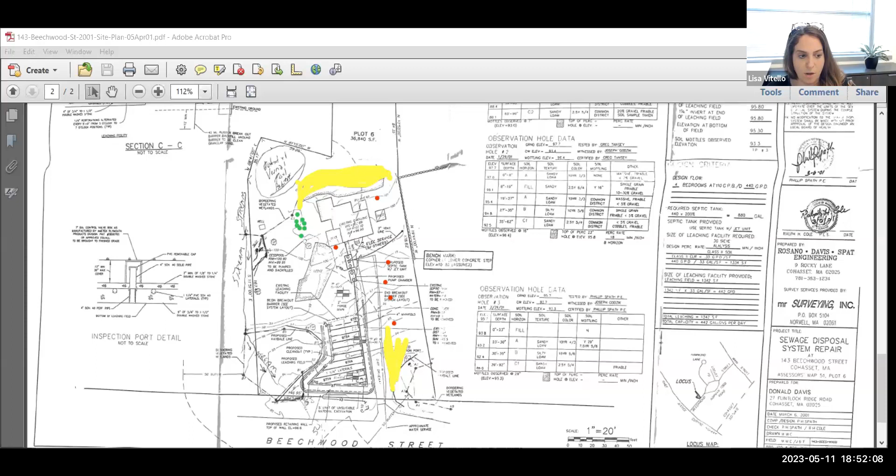Sure. Just for background, we purchased this home in January, so we are under some renovation. We're not expanding the footprint whatsoever. We're just making it up to date.

So with that, we did have an arborist come through and give us an opinion. There's a lot of trees that looked unhealthy, some were problematic from a power line perspective, close to the power line, and one had been struck by lightning. So we noticed some of the trees in the property were in bad shape and wanted another opinion. That's how we came up with this plan. We took a look at anything that was affecting or could affect people, the home, or power lines, and that's where we came up with the red dots.

I know this was from a scanned site plan, so if you guys can follow my cursor here, this is the 50-foot buffer to the bordering vegetated wetland on either side of the property. There's a BVW in the front of the property on the left and right side with an intermittent stream, and this line here is the 50-foot buffer. So there are two trees within the 50-foot buffer they're proposing to remove.

I can show you guys photos. And then 4 here, I believe, on the eastern side of the driveway in the 100-foot buffer. So she has submitted a variance request, or they have submitted a variance request as well for the work in the 50.

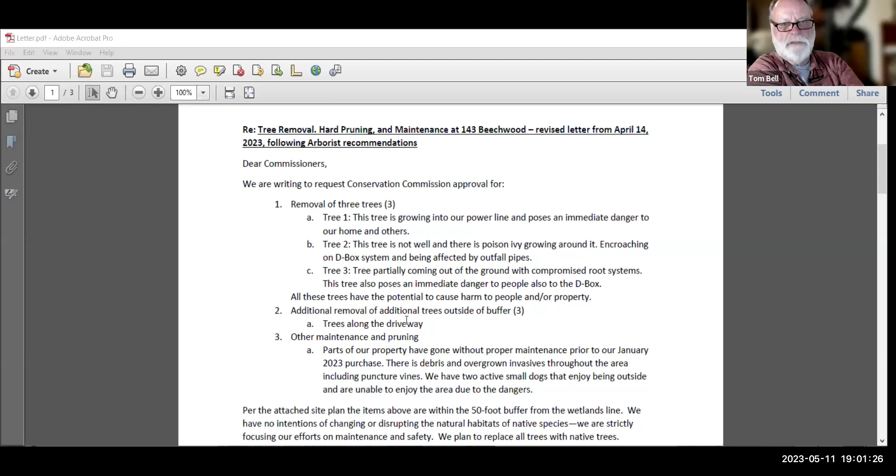Keep looking, Charlotte. Don't mean to distract you. No, that's okay, I wanted to make sure I didn't miss it. This was the letter that I received, but I don't think this is from Total Tree. No, that was our update.

So I did speak to a certified arborist, Gary at Total Tree. He did evaluate the trees - it was more just an on-site discussion briefly, but he did say that at least the trees on the eastern side along the power lines, in his opinion, should be cut down. The one tree he was hesitant on was the black cherry. He wasn't sure about the root system potentially compromising the septic tank. But at least with these trees, looking at them on site, he did say they should be removed.

I'm sorry, I didn't get anything documented. But at least the ones near the power lines, I asked him, can you prune instead of just cut? He said sometimes with those large side leaders, that could hurt the tree even more. So in those specific cases he recommended taking them out rather than just pruning, but there are definitely a handful of trees on the property that probably don't need to be cut - they could just be pruned, especially the ones over the power lines. But this was the only tree where he didn't have a solid conclusion.

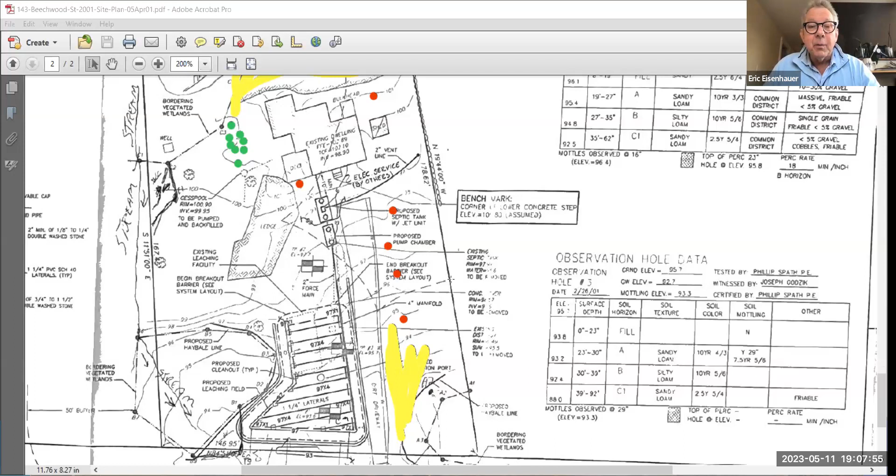Sorry, could you identify that leaning tree on this? I believe the leaning tree is this second one. Where? I'm sorry, I don't see where you're pointing, Charlotte. Can you guys see my cursor right here, the little arrow?

Second red from the bottom, Eric. Yeah, so this is the 50-foot buffer. I got it. But unless I'm mistaken, Lisa, it is the one in the 50-foot buffer, because I don't know if maybe the dots are a little bit out of place, but I thought the tree leaning into the driveway was almost directly behind that big one by lightning.

They could be slightly spaced out, but it could potentially be this tree. So it very well could be the one in the 50-foot buffer, but the dots, I admit, I'm not sure which one, if it's this one or this one. I'm pretty sure it's the second one, but unfortunately I can't say for sure.

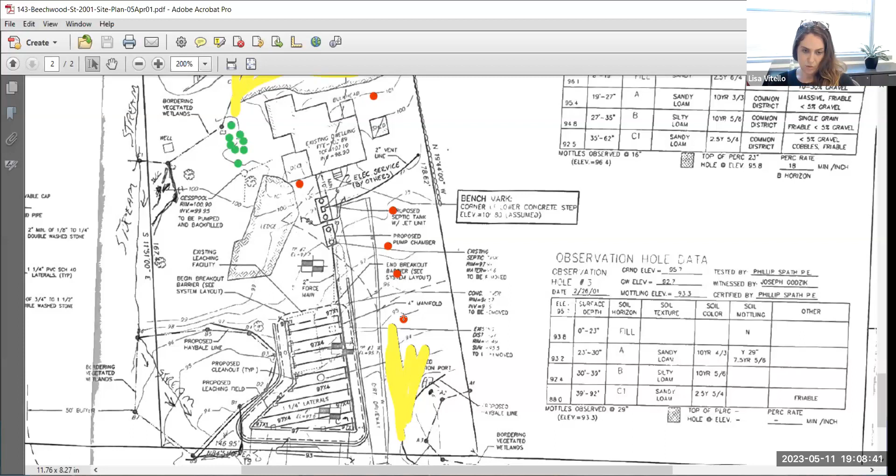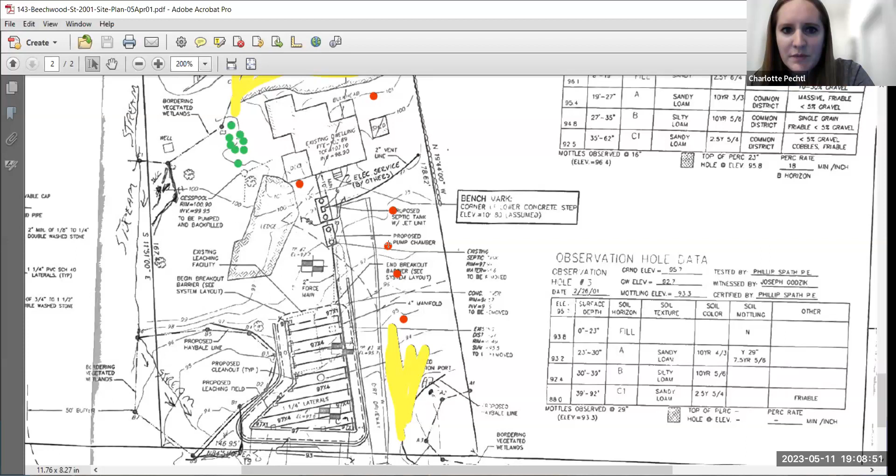Yeah, I think it's actually the third one from the bottom because it's directly also over the septic tank. Okay, so this one? Yeah, because the black cherry is actually right here, so it's almost right next to, like across from the black cherry. So it's in the 100-foot buffer.

I thought that dashed line that you showed... this is the 50-foot buffer. Oh, from the stream? I thought there was another, from both sides. Yep, so this is the wetland down on the southeast corner right here, and then this is the 50-foot buffer to that wetland, so it kind of crosses like that.

And then the stream and the wetland is right here, so the 50-foot buffer is right here. It's pretty much going through half the house and just outside of the septic tank.

Sorry, Charlotte, I don't follow anything of what you're showing there. Can I draw? Hold on, I'm gonna annotate. Hold on, I'm glad I can do this. So this is the 50-foot buffer to the stream on the left.

Yeah, the stream, let's see, is... it says stream. Hold on, that doesn't look quite right. This is the wetland here, and there's the other wetland here, and then the stream is going like, right here.

No, it looks like it crosses that. Oh sorry, it goes this way. There we go. Sorry, this is a very messy drawing. It's okay, it's all right.

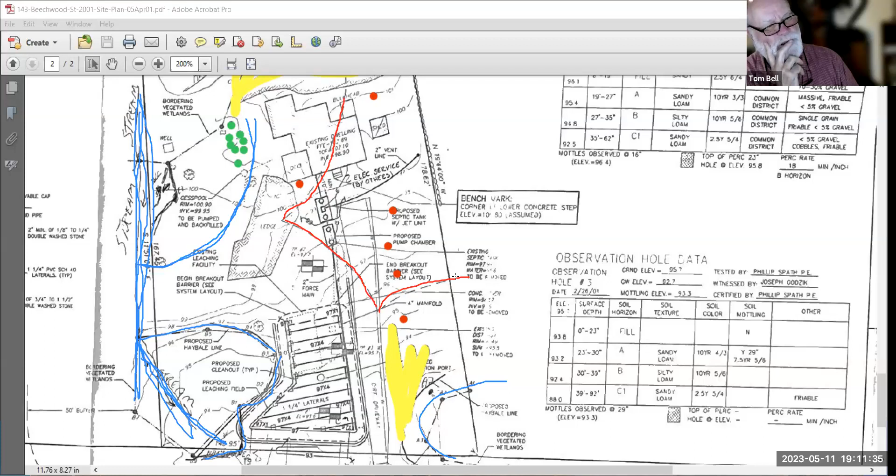What does that pointy corner of the 50-foot buffer right there by the ledge mean? That's because of the septic tank or something. The BVW border is further back from the blue line. If you see the note there, it's not actually the blue line.

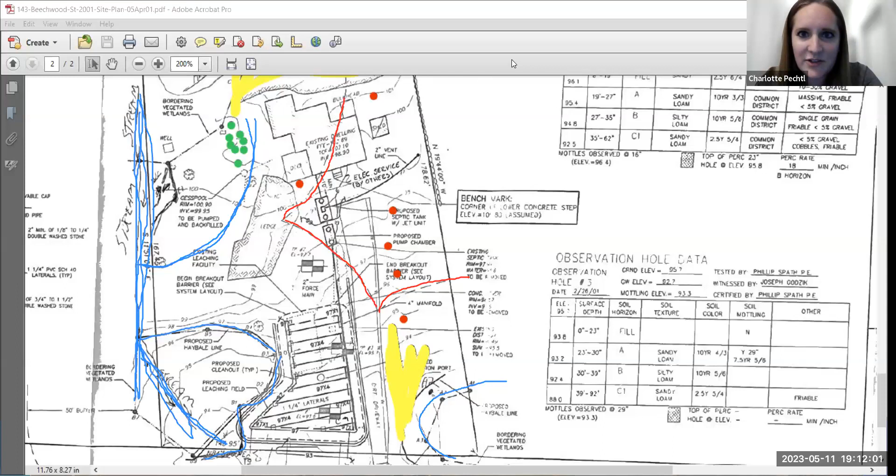Sorry, hold on, I've got to clear this. I think we need... don't clear everything. All we're determining is if we need an NOI or not, right? And it sounds like we do, because we don't know where any of these lines are.

This is from 2001, and that whole development was built behind here, and a lot of this stuff looks drier than it was then, because they put in a whole water detention system back there. So I don't even see a stream when I look at Google Maps now. There's nothing coming up on the stream there. It was a little dry because it's an intermittent stream, and intermittent streams are obviously dry a lot of the time, but at least with the wetland I can see the wetland here and here.

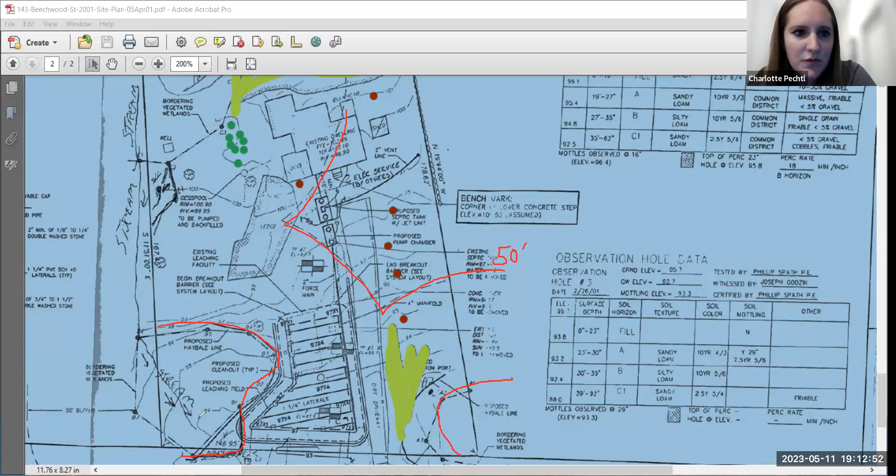Again, to the exact extent I'm not sure - how old are these wetland delineations, Charlotte? This was from... hold on, 2001. This was from 2000, hold on, sorry, I'm bad with annotations here. This was from a 2001 site plan.

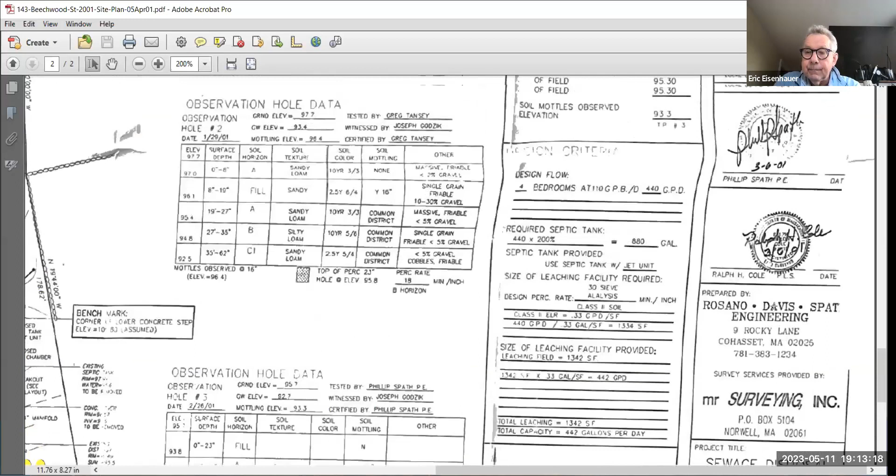This was for the septic system design. So the wetlands were probably delineated at some point between 2000 and 2001. It's out of date, so it's 10 years out of date. Isn't it 20 years out of date? Oh yeah, right, yeah, thanks.

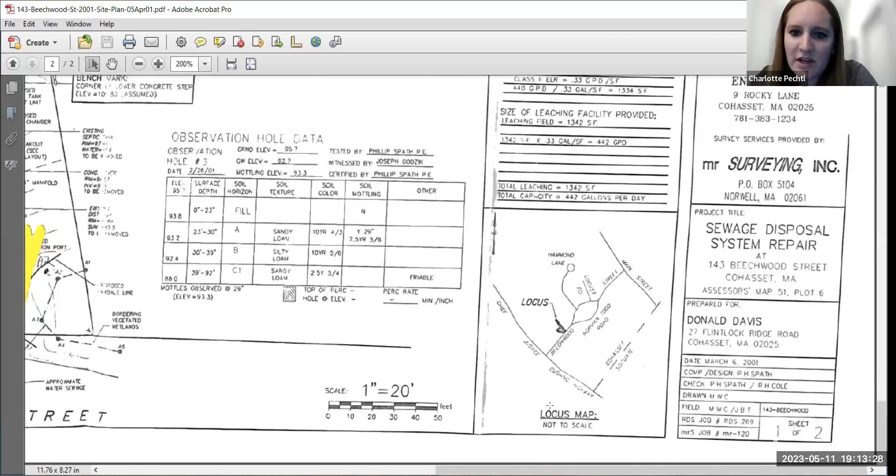Usually for RDAs, in most cases - well, this is coming back to us as an NOI almost certainly. So it should come back with a fresh wetland delineation. I would make that recommendation right now. I would second your motion, Tom. I haven't made a motion yet, but that's...

I heard you talk about an NOI here. I don't feel comfortable with enough of what I've been seeing here to take any decision whatsoever. I don't know where the trees are, I don't know where the buffer zone is, and somehow we have to have something clear and understandable that we all can discuss. I'm certainly not there yet.

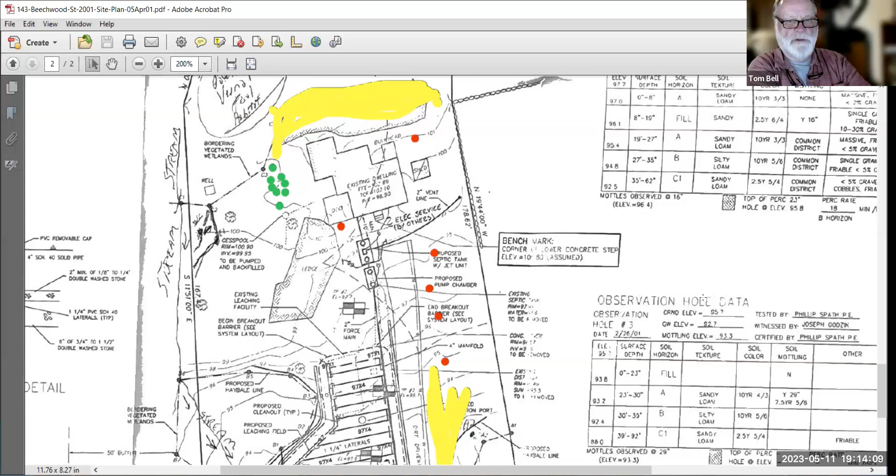So even for that tree that's clearly coming out of the ground over the power line, over the driveway, over the septic tank, I cannot take any action until there's another hearing. I'm just trying to understand what the next steps are.

I'm very concerned about this particular one from a safety perspective. You have the option of writing an RDA just for that one tree. So that one we're concerned about can be an RDA, and we can dispense with that pretty quickly and leave the rest for a larger NOI or whatever it may be, if everyone agrees.

Yeah, so something commissioners could vote on is just on this one tree, and issue a -3 determination by saying, in a condition, that the tree leaning over the driveway is acceptable to remove and does not require the filing of a notice of intent. All other proposed trees are not approved through the RDA and require the filing of a notice of intent. So you could potentially split up the work that way.

I think we've done that before, where we've approved one part of the project and said the other part, absolutely not. So Lisa, if you would want to prioritize removing just this one tree, if the commission would allow it, for all the other trees it sounds like we would recommend a notice of intent. If that's something everyone's open with, that would make me feel a lot more comfortable on this one.

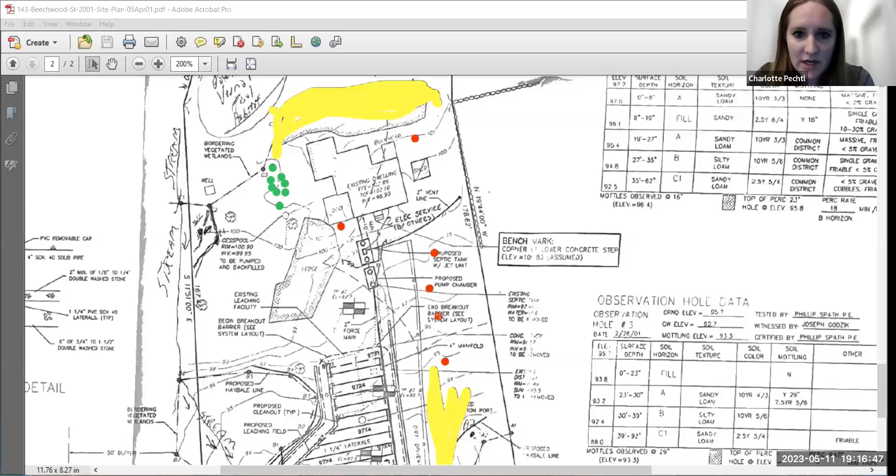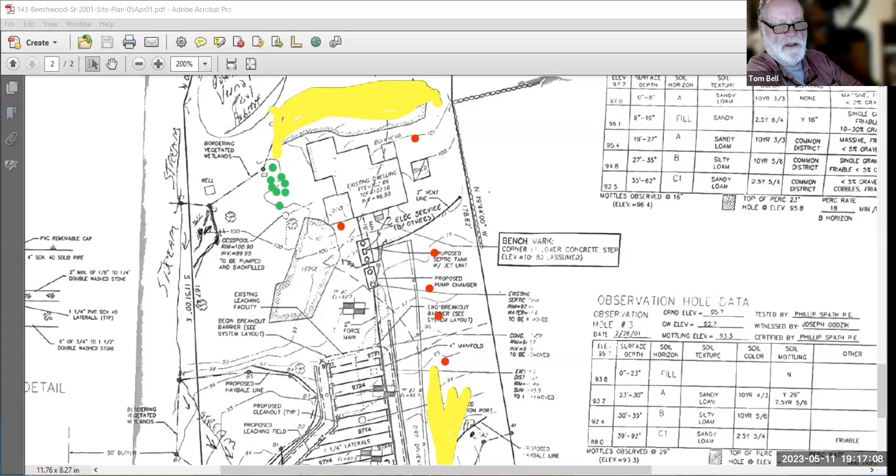So this is not the one that was in the 50, this would presumably be outside the 50 anyways. I admit I cannot be 100%, but I'm pretty sure it's this tree right here, which is just outside the 50. It looks like it's about 60 to 65 feet from the wetland. If it's the third tree from the bottom of the screen, could be this one too. It would still be in the 100. Correct. Okay, I'm all right with that then, so let's go with that.

So what is this, a +2, did you say Charlotte? It's a little tricky, so I think we would write a -3 determination with a condition that only the tree leaning over the driveway in the 100-foot buffer is approved to be removed. All other proposed work requires the filing of a notice of intent.

Okay, so moved. Oh sorry, I don't know if I can make a motion. What she said - we need to consider, is it or is it not in the 50? If it's in the 50, the wood has to stay there. If it's not in the 50, it seems they can cut it off. It seems to be the consensus, Eric, that it is outside of the 50. It's either the second or third tree, as we suspect, and if we're all happy with that, okay, that's fine.

Also, I'm sorry Lisa, I just noticed Jason in the audience. I apologize. That's fine, sorry. We're sorry if he was raising his hand and we did not see him. That's okay, we're both still in the office. We're in LA. Okay, apologize for that. Sorry about that, Jason.

Well, so I would say, Ms. Rockwood, if you're comfortable with this consensus that seems to be emerging - that the leaning tree can be removed right away, and that further cutting would require an NOI and a wetlands delineation - then we could go ahead with this. Yes, I'm comfortable. I don't know enough about an NOI, but I will learn and get back to you. But yes, as long as we can talk offline, I tend to always prove out Murphy's Law, so I just want to make sure that wall doesn't come down. I can bring you up to speed about the filing of notice of intent, so we can definitely chat after the meeting about this.

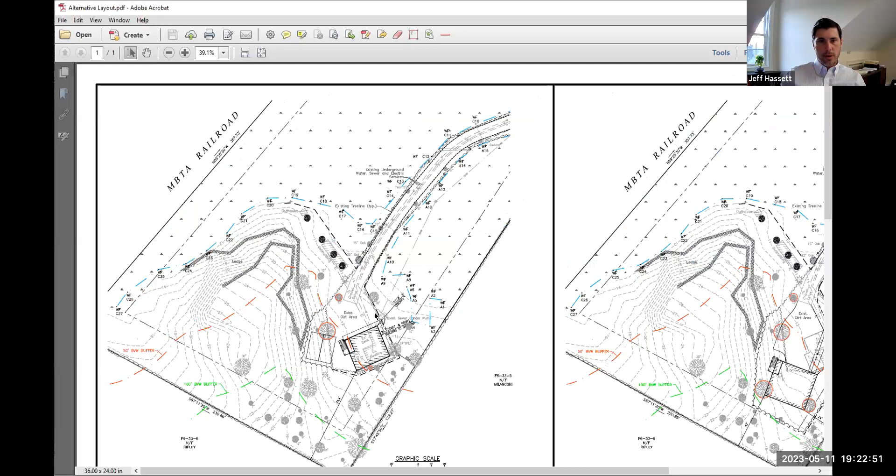What you're looking at is side by side the current proposal, which is to reconstruct the house in that same location, within the 50-foot buffer, but also within the footprint of the existing house and deck. It's going to be a slab on grade foundation, so no excavation for a basement, and no site grading. The utilities and driveway are already in place, and all the work is within that existing clearing, so it's a very small limit of work.

We're noting 3 trees to be removed, being that one, which is in poor shape, and then a smaller tree right next to the house. And that works out to be...

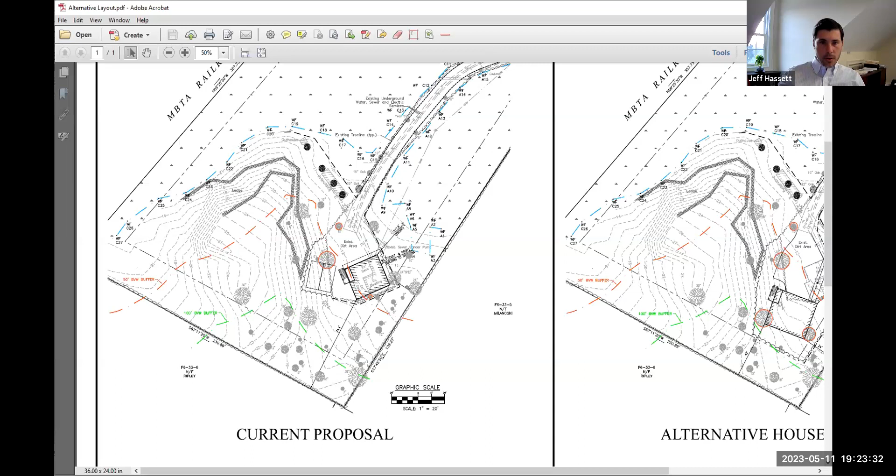Alternatively, this is what Greg, David, and myself were looking at this week, and what you talked about at the site walk earlier. We could potentially move the house entirely outside of the 50-foot buffer. It still complies with all the zoning setbacks. The driveway would need to be extended to the house, but it's again in that existing limit of work. The utilities would have to be extended too, but they fall within the footprint of the existing house, and that's a very minor job.

There are 2 additional trees to be removed, but they're outside of the 50-foot buffer anyways. What you'd end up with is 0 square feet of impervious in the 50-foot buffer, and we could also plant this area as a native planting area in the spot currently cleared and consisting of a portion of the house. So we are definitely open to that. We just wanted to use this opportunity to poll the rest of the commission before moving forward with a formal filing.

Charlotte, do you have any comments? So I guess with the alternatives, I'll just note that of course the alternative shows the home outside of the 50-foot buffer, but at least for some of the tree removal work and the removal of the outhouse and shed, regardless, we would still need a variance for any work in the 50-foot buffer.

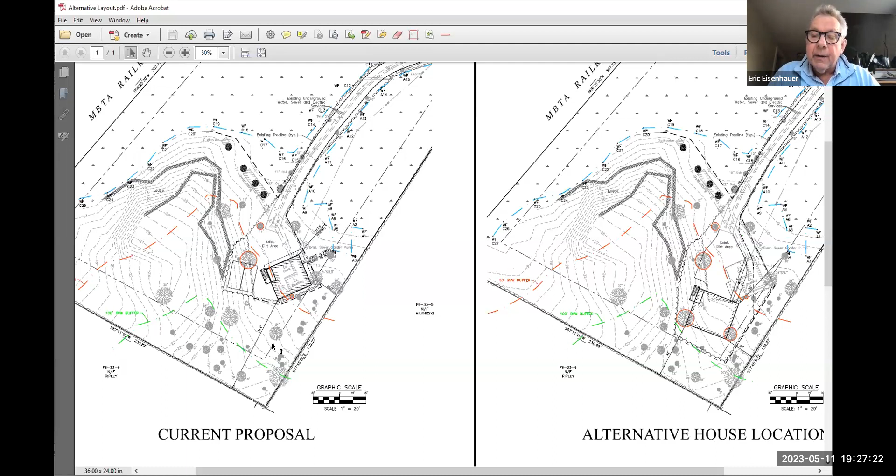But could we just, Jeff, the parking spots that are shown there, do you need to demo ledge for that? There's ledge right next to it, is that an issue? Yeah, there probably would be some hammering for that, to park there outside of the 50-foot buffer, but yes, some hammering. Still, I think, it's my opinion. Jeff, if you look at the new site, could you slide it to the left, please, the drawing? Where is the parking to be there?

So the gravel driveway would be extended to the garage doors. All right, so it's in front of the house in that area that's currently in the existing developed area.

To me, maybe a bit contrary to Chris, we have two projects here. They both require the same trees within the 50 roughly to be taken down. One is building a new structure outside of the 50, which is entirely preferable. At the site visit, we found they could take the old structure down by hand, leaving it a relatively undisturbed site. It seems to me the new plan, with construction outside of the 50, is probably going to be much more preferable from our viewpoint than the one with construction in the 50.

The trees are neutral because they're the same in terms of the ones that are cherished, which is the two in the 50-foot buffer that have to come down. So there's no difference there. But I think I would support the new plan.

I would add that in the new plan, there are 2 additional trees being taken down, but we're opening up space for plantings, so we could essentially mitigate for them. These are the trees behind the house, right? Right, but those are outside the 50. They're beyond our control.

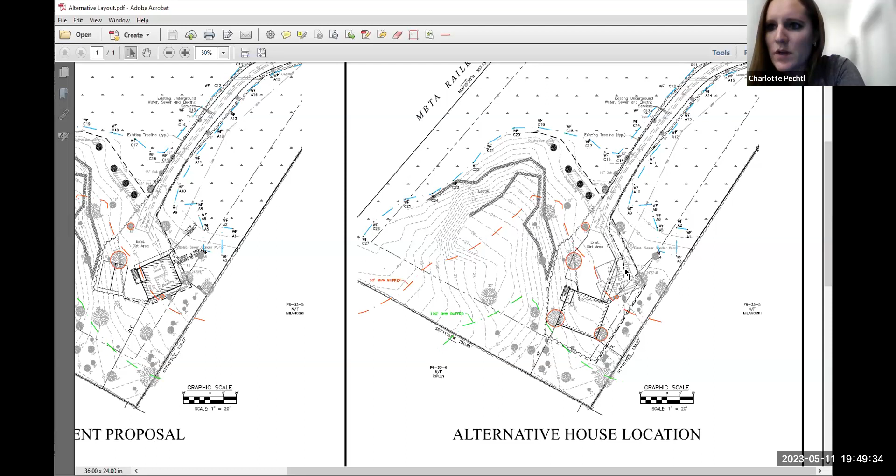So just reiterating, did we want to see a test pit within 5 feet of that section of the house? It sounds like the overall preference at this time seems to be the alternative site plan, so we'd probably want to see that analyzed a bit more. If you're able to save that larger oak tree, I'm sure a lot of commissioners would be open to that, maybe looking at different orientations for parking, assuming our chair would also want to see this plan. Are we missing anything else? Any other information or comments or questions if we were to continue to the 25th?

Charlotte, I have one question for Jeff. We do the test pit in either Plan 1 or Plan 2, and you cannot get 6 feet, but you get 2 feet until you hit ledge. What happened? Do you have a Plan B for the utility?

Boy, that puts a wrench in it. Yeah, well I think we probably look into how extensive the ledge is and what would be involved in removing it, and what volume. If we know you only have to come down 2 feet, we'll look into what type of hammer can do that and how long that would take.

Remember, you're in the 50-foot buffer zone. Right, you probably couldn't do any of that.

Eric, I really don't think we have a problem with a ledge underneath that existing cottage. I don't see any ledge outcrops in that area either. Yeah, I'm optimistic anyways. I think we can find a way to avoid blasting or hammering to bring the utility lines into the new site.

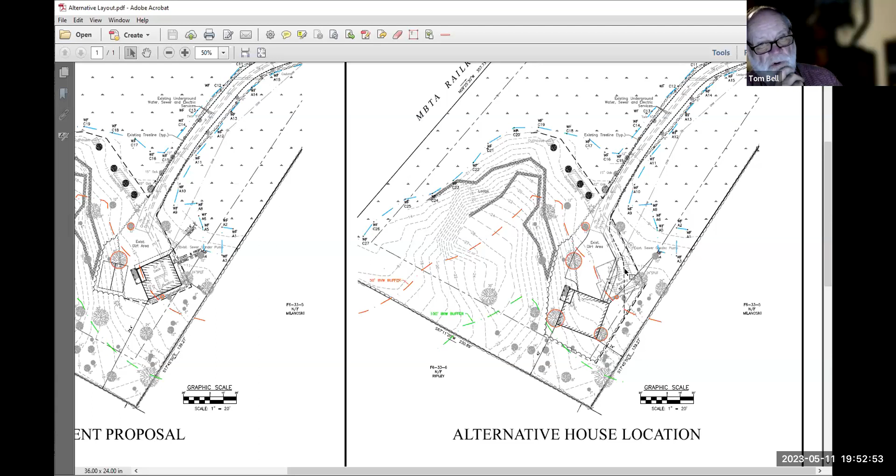3 feet wide and 6 feet deep? Yeah, about that. Or does it have to be 4 feet? I'm not positive, but I'm sure there are open trench rules here that specify the dimensions of a trench. If you go 6 feet, no doubt the state has regulations about how wide or how narrow it can be—probably a minimum width. So a 6-foot trench is no joke when you're inside of one.

Yeah, we could also look into a trench box too to minimize that width. Yeah, okay, yep. So it sounds like we need a Plan B for the trench, which might actually mean relocating it.

So you have to tap into it, say at the end of the driveway, and go straight down the new proposed driveway. That might be a possibility, or it might be a requirement. You might have to hunt around here to find a length, a depth that you can work with without breaking rock. So some alternatives would be helpful.

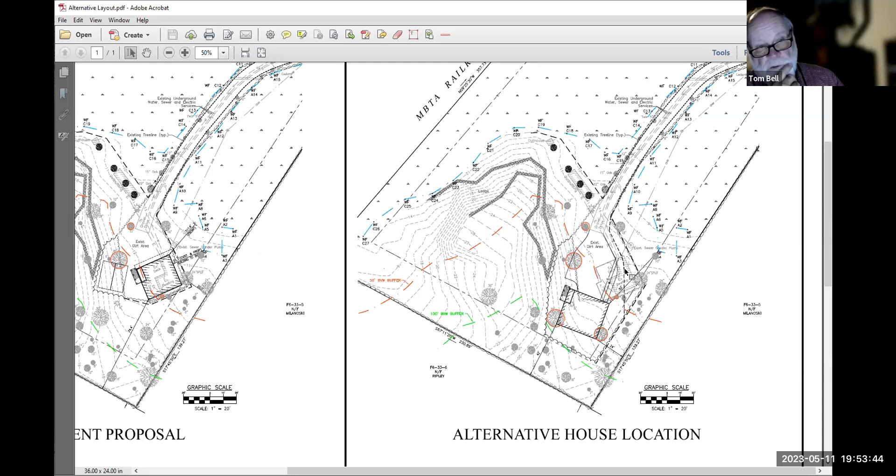Maybe more than just a couple of—well, let's just say that once you put in your test pits and get good news, you don't have to worry. If you get bad news, then you might consider an alternate route and do test pits along it, and you might find yourself hunting around until you've got 6 feet.

And in that case, an auger is probably a lot more effective—a power auger on the back of a small tractor would probably be the way to go. You can put in a hole in 2 minutes and do very little disturbance in the 50-foot buffer. If you start poking holes down here with an excavator, you're going to do a lot of excavation in the 50, perhaps just looking for a route for your utilities.

And I think it would be much more acceptable to see 4-inch auger holes here. You're not trying to determine the soil types or the depth to water here, you're looking for depth to bedrock. So an auger mounted on the back of a small tractor would probably be the way to go here, to minimize the disturbance that your exploration is going to entail.

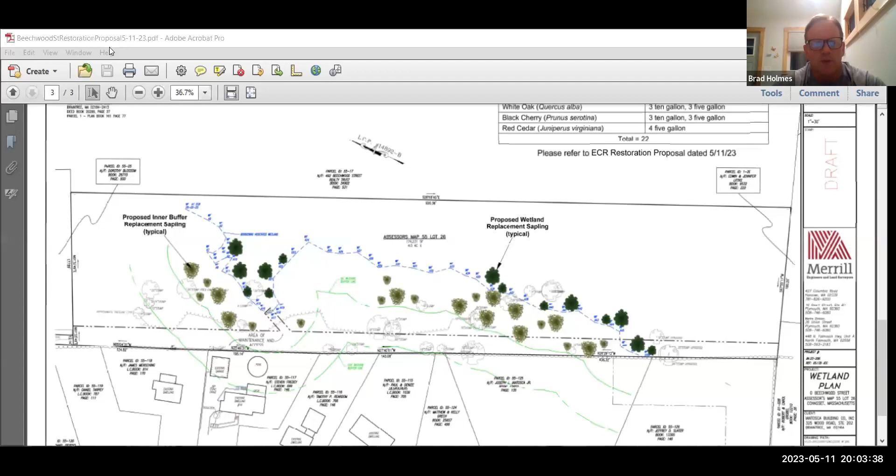What we're proposing is a 2-to-1 ratio of plantings for replacement for the trees that were removed.

One thing you have to keep in mind on this site is that it's extremely stony with rock boulders everywhere. So it's not a site that's going to be optimal for planting. It's going to be a situation where we're hunting around for planting spots within the area, and we have to manage plantings that can be carried into the site and planted manually. If we were to get large replacement plantings and try to use a machine, we'd just be digging up boulders. I think we'd be blowing up the area more than we'd want to, causing a lot more disturbance.

Furthermore, we just restored the outer buffer zone with the stabilization we described. So if you see here, this is kind of a schematic. What we're proposing is a mixture of larger and smaller size saplings. We have buffer zone saplings and wetland saplings. I've selected species from your list, which I agree with fully, so the species would be wetland species within the wetland and upland species in the upland.

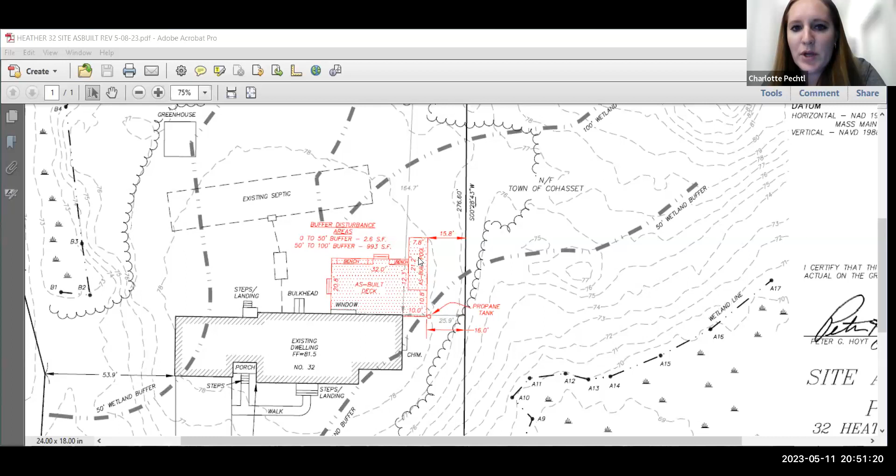Yep, no worries. For 32 Heather Drive, just to refresh everyone's memory, let me pull up the as-built. This was a deck and pool project with only a tiny portion of the work crossing the 50-foot buffer. Upon my final site confirmation, the deck and pool were built per plan. They actually, I don't know if it was just a survey thing, but they're pushed a little further away from the property line. The original was like 14.7 for the corner of the pool and 14-point-something for the deck, so it's a little bit further away.

Really the only deviation that the engineer noted in their COC request was the deck spacing was a little tighter, I think it was 1/16 to 1/8 instead of 1/4 inch spacing. But based on his calculations and the size of the site, and it being in the 100-foot buffer, he didn't anticipate any negative impacts to drainage. So at least with me, I have no concerns with that.

The one deviation I did note on site is that a propane tank was installed just at that corner, reaching into the 50-foot buffer. After talking with Rich, he said the distance for this propane tank has to be at least 10 feet from the foundation of the home, and the original tank was right in the corner, so it was not in compliance. They had to push it out to meet that setback requirement for building code.

But other than that, that was the only deviation I found in addition to the deck spacing. The site has been stabilized with hydroseed, and where they had some temporary construction entrances under our variance, that has been stabilized as well. If the commission wanted to issue a COC, I would recommend the ongoing condition number 40, with no herbicides, pesticides, etc. in the buffer zones.

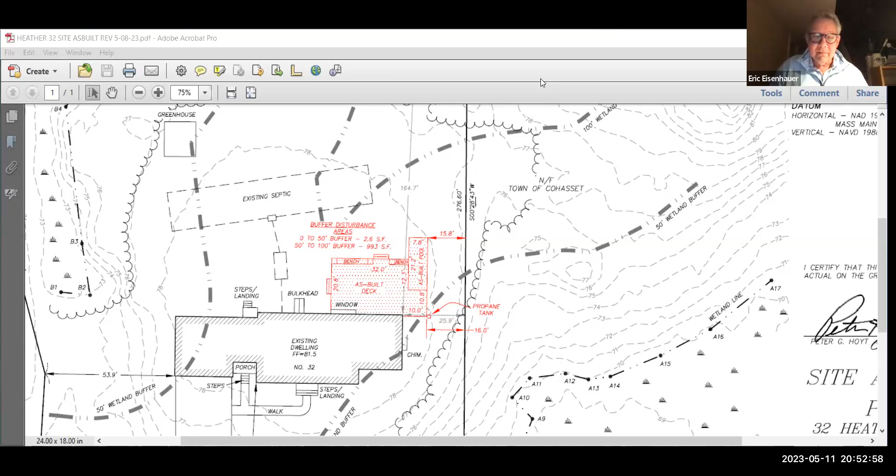Good, yep. Sounds good. No questions, comments? Next. Okay, all right, someone's got to make a motion.

I move that we issue a certificate of compliance for 32 Heather Drive, with the special condition 40 remaining in place.

Second. And with that, we'll have a roll call vote. Let's start with Will Ashton. Will Ashton, aye. Kathy Berrigan, aye. Eric Eisenhauer, yes. Chris McIntyre, aye. Tom Bell, aye. This passes 5-0-0.

Okay, thank you Rich. Thank you. Thanks Rich for staying out of the buffer and doing a great job. Thank you. Yes, thank you. Very, very cooperative, thank you Rich.

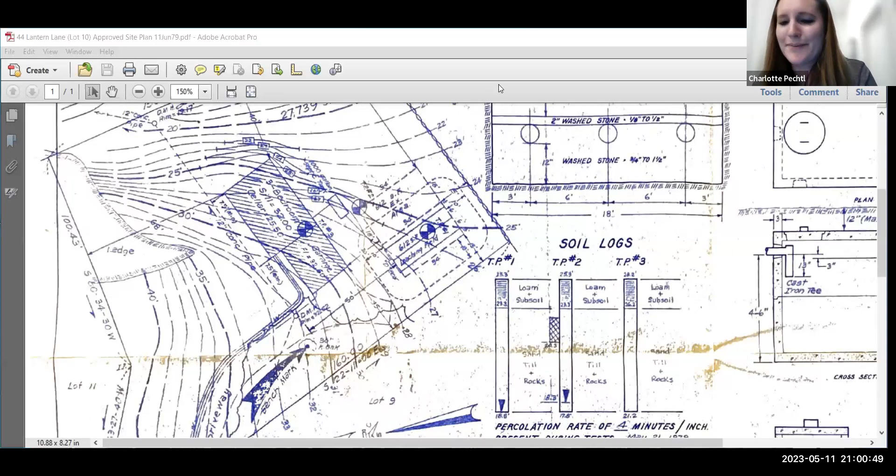Okay, so there's no one here representing the owner. I do not believe so, unless Kevin is here for anybody else, but I don't believe so.

Okay, with that said, then I move that we issue a certificate of compliance for NOI from 1979, DEP file number 13-49, 44 Lantern Lane, with no conditions. Do I have a second?

A second. With that, we'll have a roll call vote. Will Ashton, aye. Kathy Berrigan, aye. Eric Eisenhauer... I'm back, aye, sorry. No problem. Chris McIntyre, aye. Tom Bell, aye. That motion passes 5-0-0.

One more to go, Charlotte. All right, how am I doing so far? Great, you're doing great. Unfortunately, I'm going to break my short track record with this one. So this one is... oh, I know, I'm sorry. I'll try to go fast.

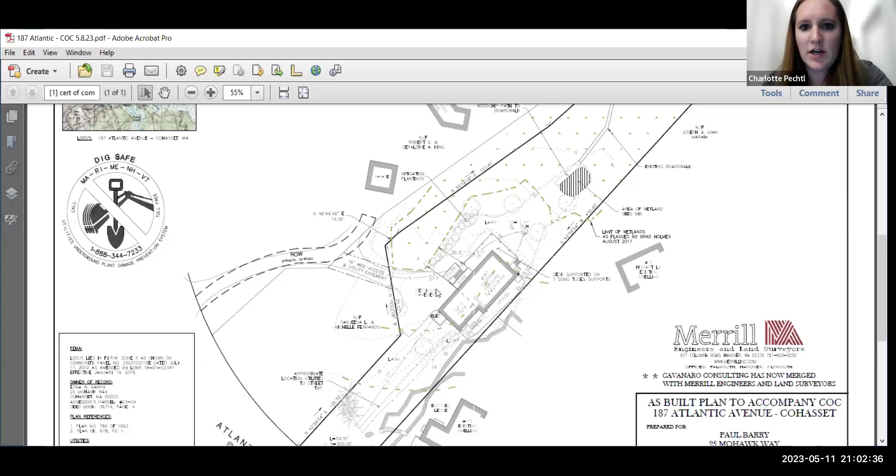But basically, the engineer did note a few deviations, that the garage doors are actually now located on the western side of the house. They were originally supposed to be built on the southern side with the driveway actually being larger. So by building the garage entrance on the western side, they made the driveway turnaround here instead of over here. So it's a little bit smaller in design.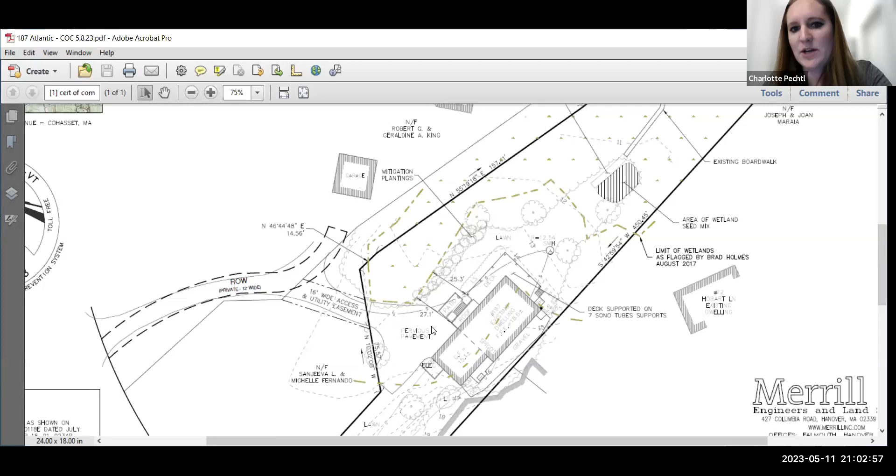They also did speak with Jeff Summers about switching from gravel to permeable pavement. I could not find any written documentation of this, but I did talk to the builders, the contractors. They hired Plymouth Paving, who Jeff recommended back at the time. They did discuss it on site. So the original driveway was supposed to go down here and was supposed to be a lot bigger, but they made the turnaround a little tighter. The driveway entrance here meant less disturbance, at least for driveway construction. And Jeff, at least on site, approved of the permeable pavement.

The only concern I had was that the original plan said gravel, so the long-term operation and maintenance plan did not include the details for maintaining a permeable pavement driveway. So I actually requested in advance of this meeting to update the long-term O&M plan to have the details for permeable pavement, which they have done. And I told them, per our regulations, it does need to be recorded prior to the issuance of a COC. So if the commission did want to issue a COC tonight for the stormwater permit, I would recommend a condition that we issue it the second they give us recording proof for that long-term O&M plan.

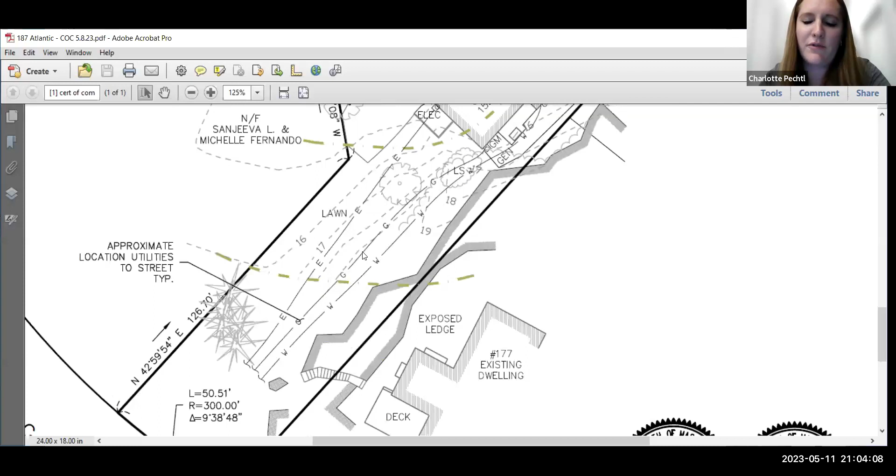And then the shed that was supposed to be constructed in the 100-foot buffer was never built, and the owners acknowledged that they would need a submission in the future for that. Those are the deviations noted by the engineer.

And now we get into the other deviations. I'll just note that it's not shown on the as-built, but there is a small drainage pipe connecting from the western side of the home into the wetland. I imagine this is from the roof runoff because judging from the roof leaders and downspouts, it does look like it's connecting from the roof, so it would theoretically be clean runoff. It's not coming from the driveway; it's coming from the roof leaders, underneath the ground, into the wetland.

And I'll show you guys pictures of that if you want. There was a small bluestone walkway that was added right here, but it's a pretty small amount of impervious surface, and the engineer didn't have any concerns. Same thing with these little granite stepping stones on the northern side of the home that go around to the back of the home.

And then the deck was just built slightly differently with a couple less sonotubes. So I don't have any concerns with that. It's supposed to be 9 and there's only 7.

And then I asked about the pervious pavement, and the engineer did say as long as it's properly maintained, it won't have a negative impact to the drainage in the wetlands. So that's why I said we need to revise the long-term operation and maintenance plan, and they did do that.

The plantings. So from the original plan, there's supposed to be plants right here, right in front of the wetland, which you can see on the as-built. And they removed a guest house that was in the wetland, and they were supposed to put down wetland seed mix, which has been installed, and also install native shrubs and stuff here. Unfortunately, it's not clarified on the as-built.

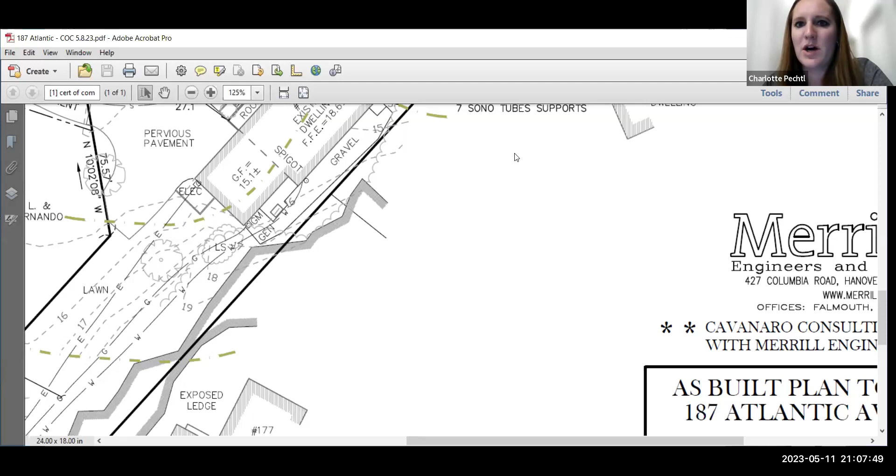But I guess, does anyone have any concerns about the permeable pavement or the smaller wetland seed mix area? The boardwalk was a separate permit that we had originally closed out last meeting, but does anybody else have any other concerns with those deviations? And would you guys entertain a COC if they remove the hydrangeas and record the long-term O&M plan?

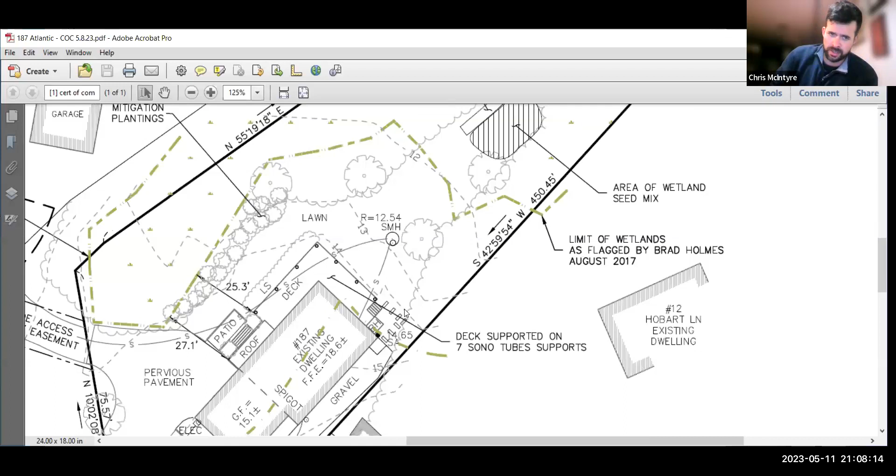I have a question about clarification on long-term. Go ahead, Chris. Oh, the drainage pipe that was added, you said it seemed like it came from the roof leaders, but was that just your guess, or was there something else? Unfortunately, that's just my guess, yeah.

I can pull up the original plan, but unless I'm missing it and I'm blind, I don't see it on the original plan. But when that house was finished, but not inhabited, there was a continuous sump pump running into the wetlands because it's very, very wet there and it's clearly a basement moisture problem.

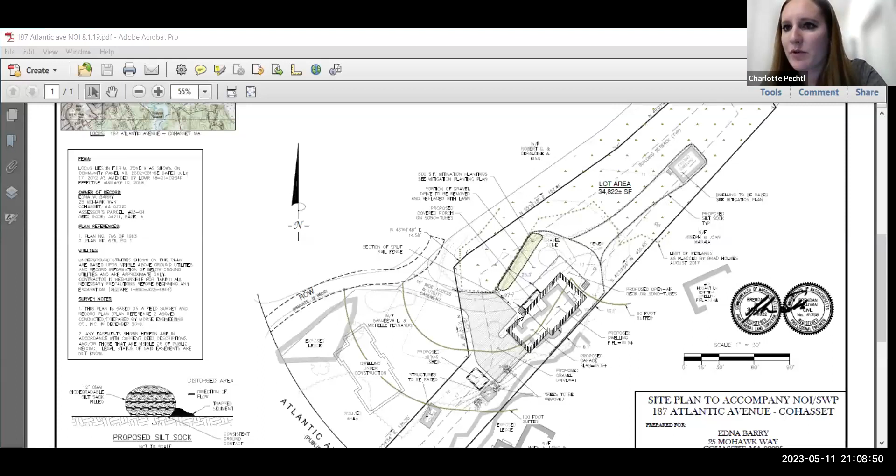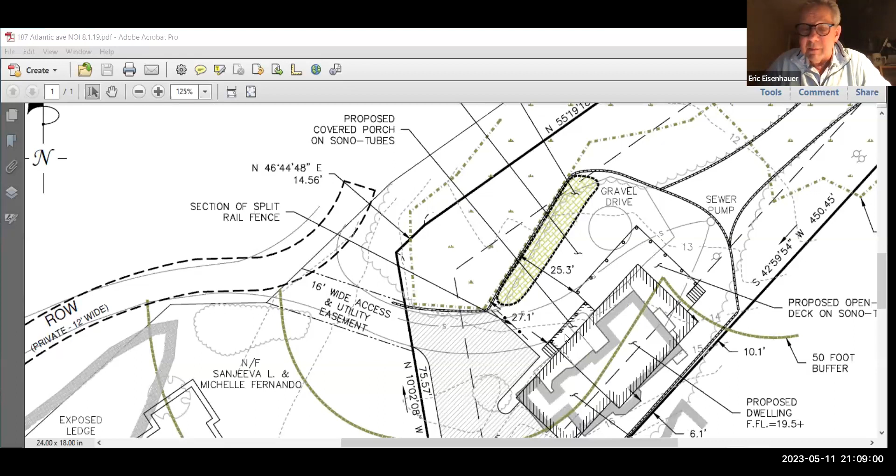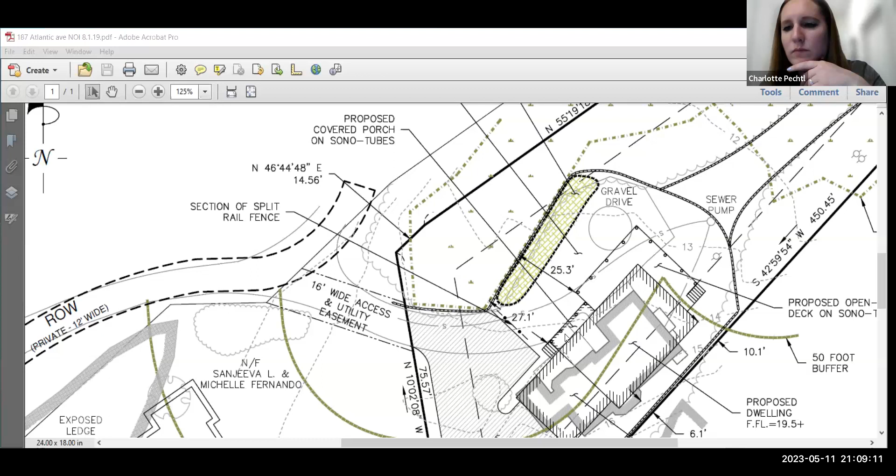It was running pretty much every 5 to 10 minutes when I was on the site. Do you think that's the same thing, Eric? I have a feeling, yeah, it's probably an internal sump pump draining the basement, for good or for worse, I don't know. But that was clearly the case during construction. That's actually probably right, because when I was on site doing an account of all the plantings, I did hear it going every 5-10 minutes. So it probably is the sump pump drain. And that was originally existing, I guess?

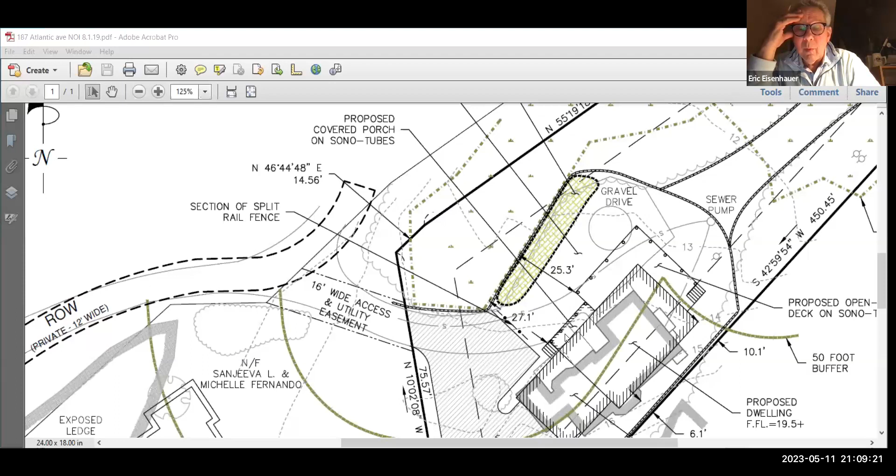I don't know. This was an existing home already there, built in the last few years. And it's obviously necessary to have drainage because the low point is very wet. No one thought they could even build a house there, it was so wet. I don't know when this house was originally built, but I'd say probably 5 years ago or less.

Okay, all right, I agree with that. I'd say it's probably the sump pump then, because it was running every 5-10 minutes when I was on site. I'd be concerned about somebody using their sump pump directly into a wetland, particularly if they had oil heating and that boiler's in their basement and stuff.

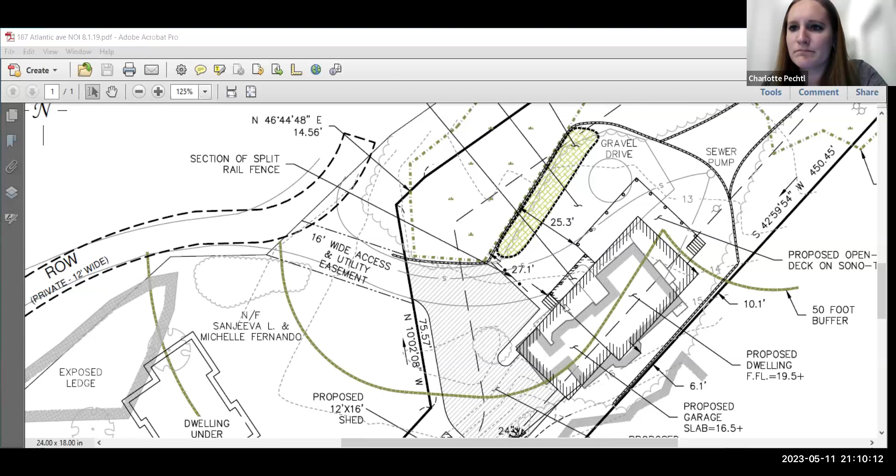Yeah, I mean, even if it were a sump pump, you can't just pump into the wetlands. That's what I'm not sure about, what's going on here. The place was a marsh, no one thought they could ever build a house there, it was so wet. So they built a house, and they decided to pump the water that was in the marsh before it came into the house back into the wetlands. So I think that's the logic.

As Tom says, it could be polluted, that could be a problem. So it's literally, if it's not in the wetland, it's obviously directly right in front of it. It's probably less than 5 or 10 feet from the wetland at best, or almost directly in the wetland, depending on where they delineated this. Some of the flags were gone, so I couldn't see where the actual line was.

It's been a while, but that water should be infiltrated, not discharged directly. I don't think they should be discharging water of uncertain quality to the wetland like that. Agreed, I think we need verification of the source and when it was installed. That's my opinion.

I agree, if it's bad water, I don't know what they do with it, but I'm sure Tom has some inline filter he could put there. Is that right, Tom? Well, soil's a pretty good inline filter, and maybe that pipe should be perforated. But the problem is the water table is so high there.